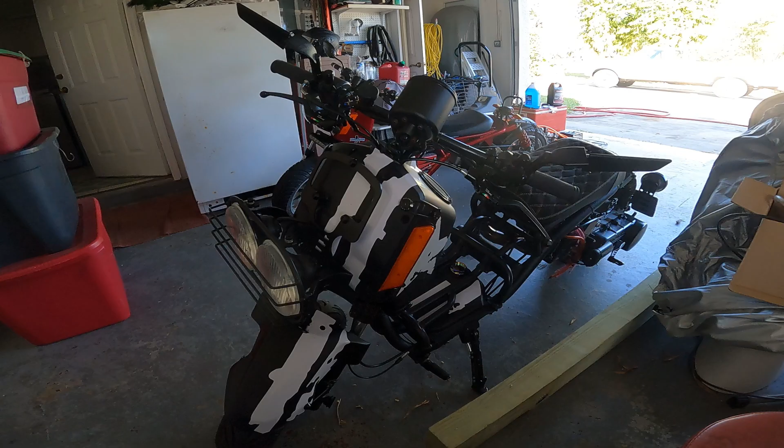I need NOS. Why the hell would anyone put nitrous on a 150cc GY6 scooter? Well, because it looks cool as shit, is why. I'm going to do this video a bit different. I'm going to show you the results of the nitrous first, kind of a before and after, or a side-by-side comparison with and without nitrous. And mostly just for gee-whiz factor for most people watching the video.

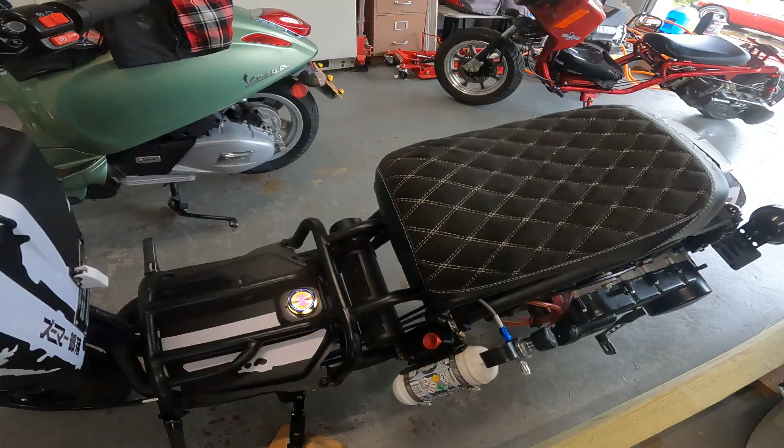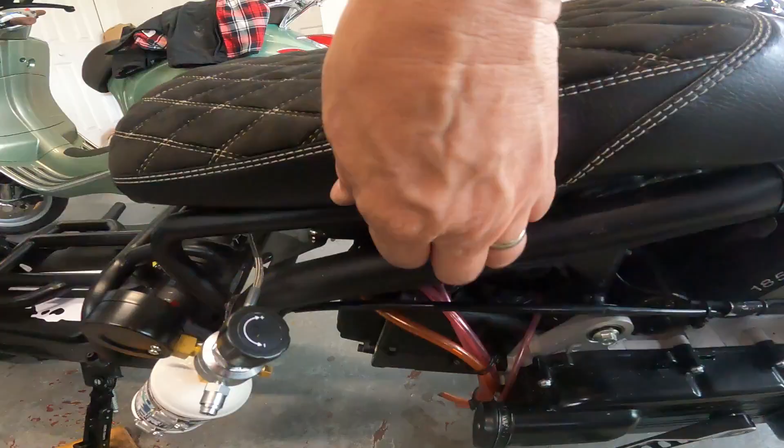But the few of you that want to do nitrous, I'm going to keep on going with the video on how to do it. There's a lot of stuff you have to know to do nitrous, to do it safely and do it accurately. It's not just a simple plug-and-play thing. It has to be tuned and everything else.

If you follow how I do things, I see what RPM I'm at. If I'm running 9,000 RPM, then I gear the bike up. Then, if I can't make 9,000 RPM, I do power mods till I can. So, my last thing I did was the 171 kit. I was making 9,000 RPM. I geared the bike up with the rear end gear kit, and that put me back down to 8,000 RPM. My plan now is to use nitrous to get me back to 9,000 RPM and more top speed.

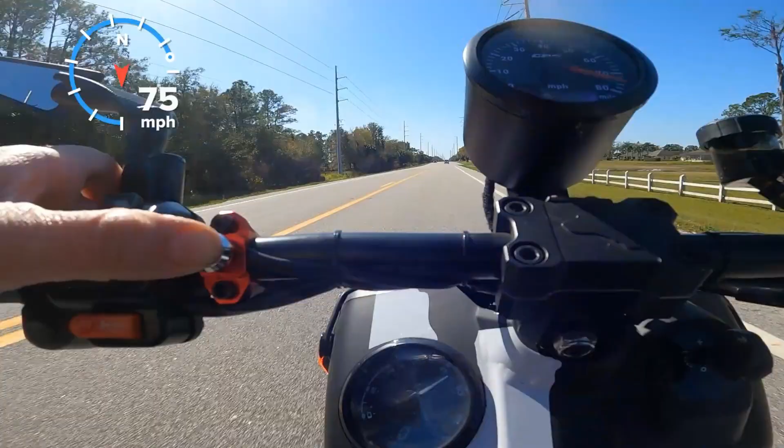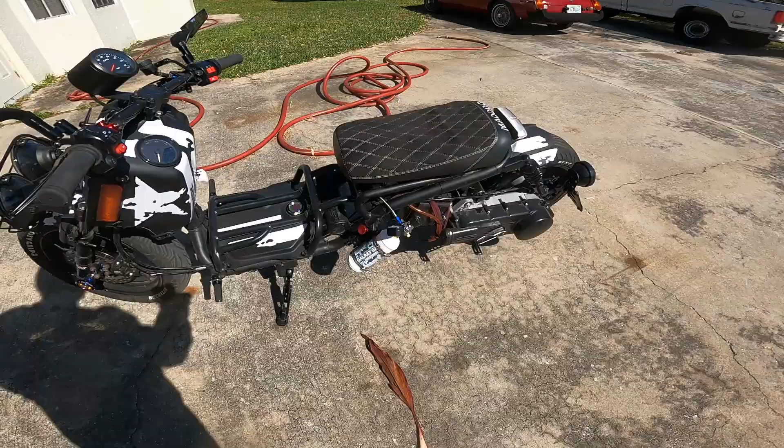This thing just kept on going on the spray. I think it would have went 80 or more. Looked like I was hitting 9,000 RPM, so I backed off because I don't want to go over 9 grand shooting nitrous in there. Who the hell knows what'll happen? But yeah, epic. All right, that mod is super cool.

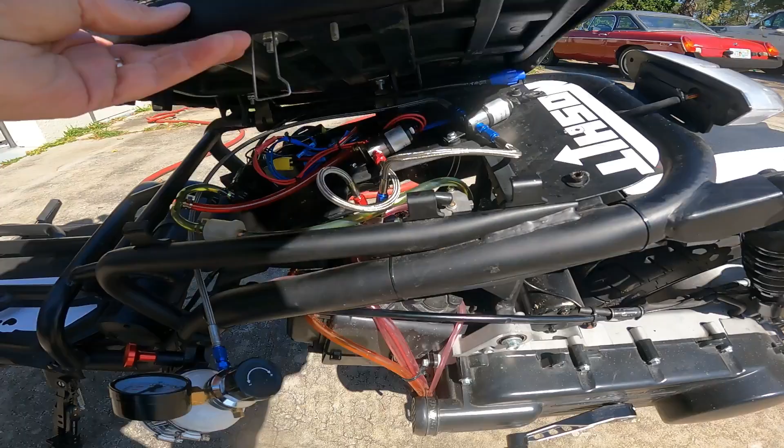Not only does it just add tons of cool points, but it's super fun. I just can't get enough of pressing that red button. Holy crap. It's really awesome. And yeah, so it worked out pretty good using the whippet there.

And this is a long video to follow. It should be a mini series on Netflix, but there's just so much to cover when you're putting on nitrous. How to install it, how to not blow your motor up, how to tune it, and all the things involved. It's just a long video.

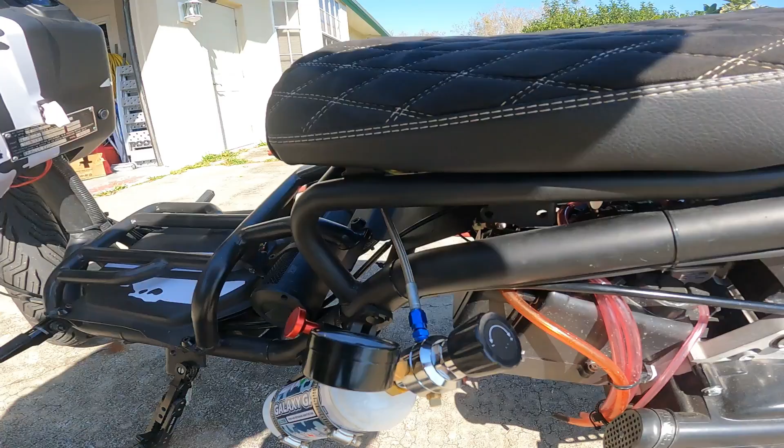So yeah, you can laugh along with me at the comments where everyone tells me I'm gonna blow my motor up. Mostly the people that comment like that didn't watch the video. But if I do blow it up, who the hell cares? I'll put a 232 in there, make another video. That's just too freaking fun.

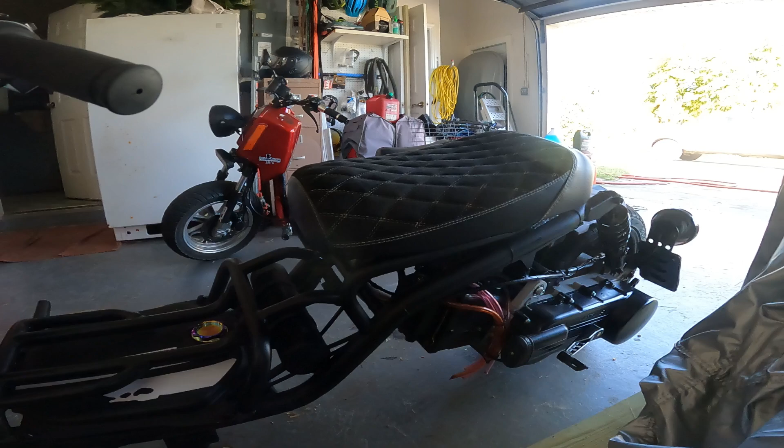The big fear on nitrous is you're gonna blow your motor up or whatever. And there's some truth in that. But we have to understand what nitrous is first before we install it. Laughing gas, nitro, NOS, NOx, whatever you may call it, it's all the same stuff. It's technically N2O, dinitrogen oxide. It's a plenty safe substance. It's the same stuff that's in the air we breathe, nitrogen and oxygen.

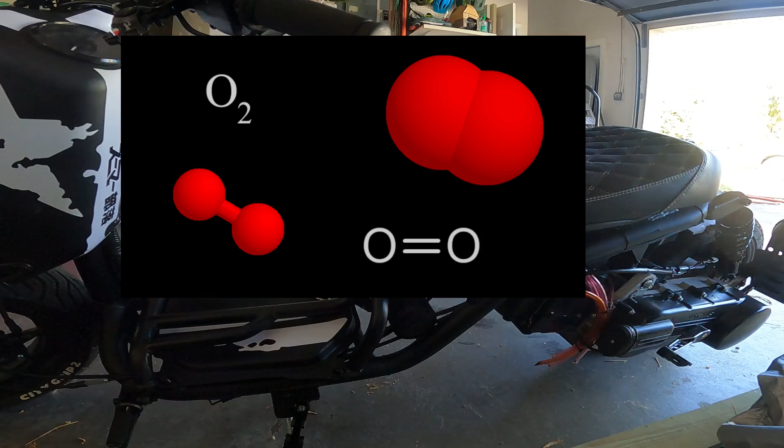Contrary to popular belief, nitrous is not flammable. It's just like oxygen. It's an oxidizer or an accelerant to a fuel. Oxygen causes fuel, or whatever it's burning, to burn hotter and faster and requires more fuel when it's burning. Let's go back to class here. Just like in your OSHA training, you have the fire triangle. You need 3 things to create fire: heat, fuel, and oxygen. You take away one of those things, the fire goes away.

So the oxygen is just an accelerant or an oxidizer for that fuel, to allow it to burn better and hotter. But the big fear behind using nitrous is we're going to blow our motor up. And to address that, you really have to understand what blows a motor up, what that actually means. And to understand that, you have to understand what detonation is. Detonation is what kills your motor.

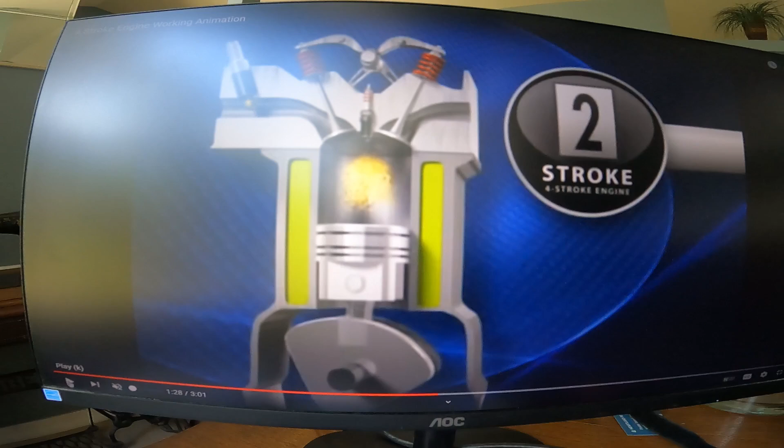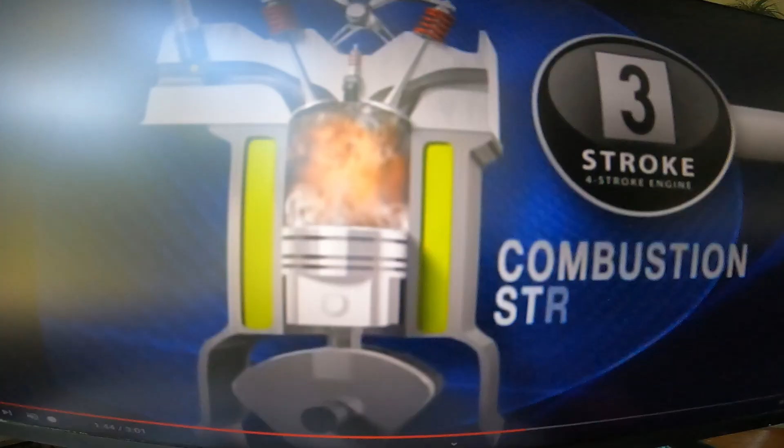All right, the piston pulls down and sucks in an air-fuel mixture. Then it pushes back up for the compression stroke, and a spark should happen right at the top there. That spark plug is going to ignite the fuel-air mixture. It's going to blow it up and push that piston back down with a lot of force. That force they refer to as head pressure. The more fuel and air you put in here, the higher the head pressure, the more force you're going to push that down with. The spark plug has to be timed perfectly to explode that just as the piston's heading downwards.

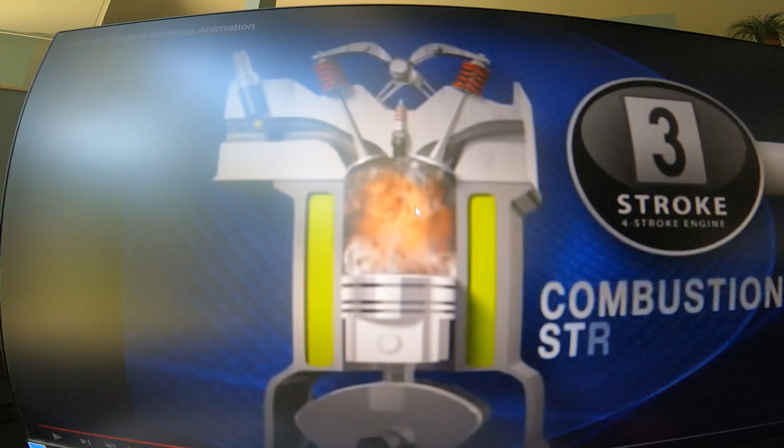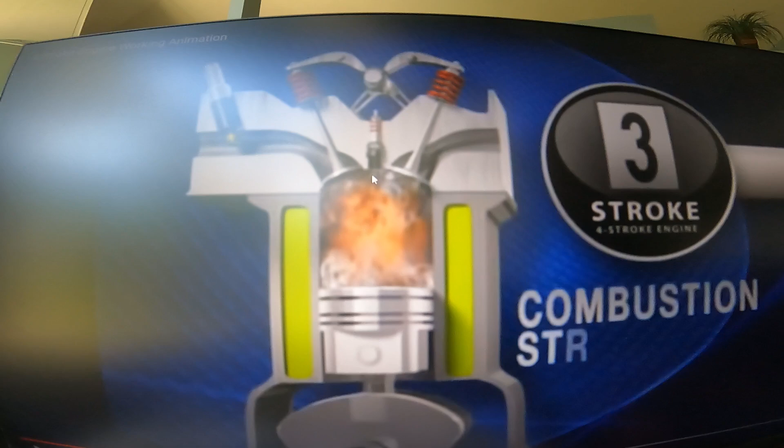And that's done through ignition timing, a pickup sensor on the stator that tells a spark when to happen, but it actually doesn't tell the spark. That goes into your CDI. Someone that made that CDI has mapped it, we'll say, a timing curve of degrees before and after top dead center of where that spark's going to happen.

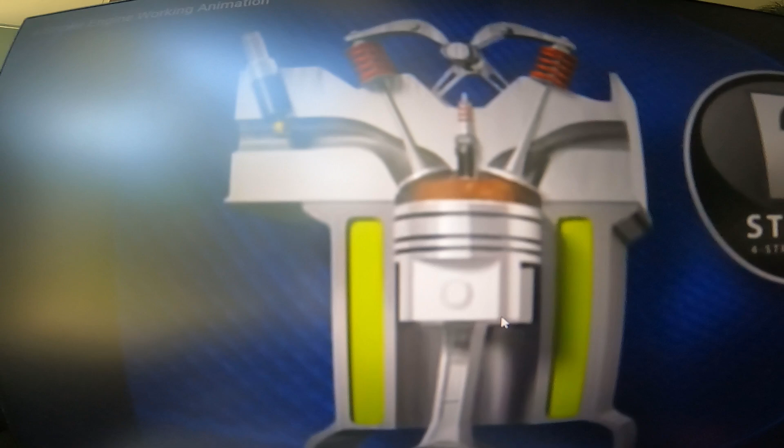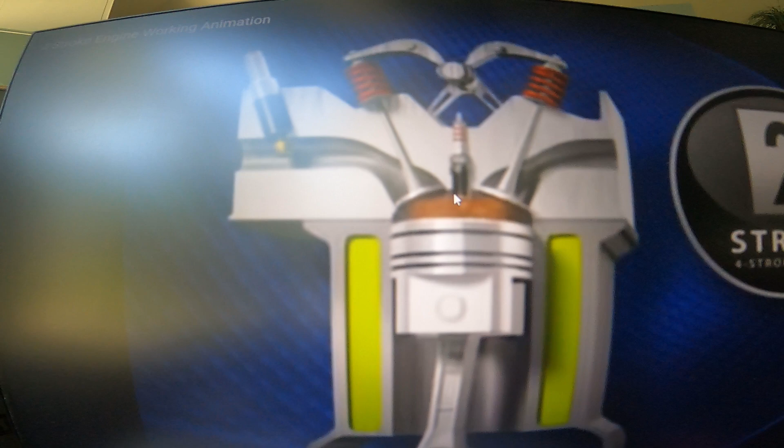So what that means is a little bit before that piston reaches top dead center, maybe right in here, it's told to spark. Because the engine's rotating and it's hard to time this, if you want to get this thing nailed right at top dead center when it's going to make the downstroke and all that pressure is going to push the piston rod down, you've got to kind of tell it a little bit early to spark. And by the time it sparks, it nails it right at the perfect place.

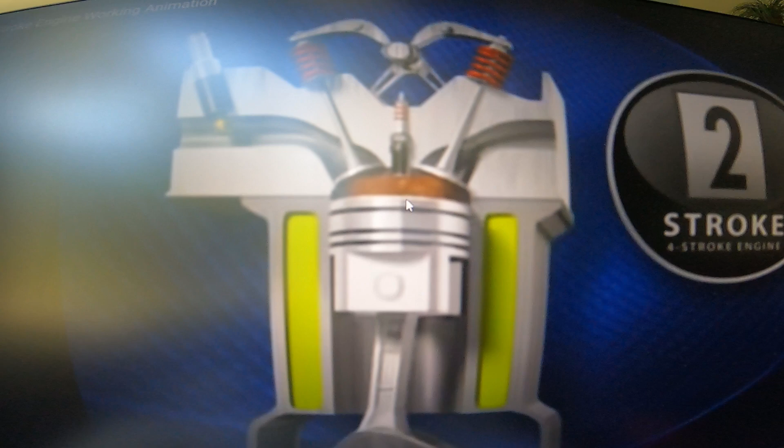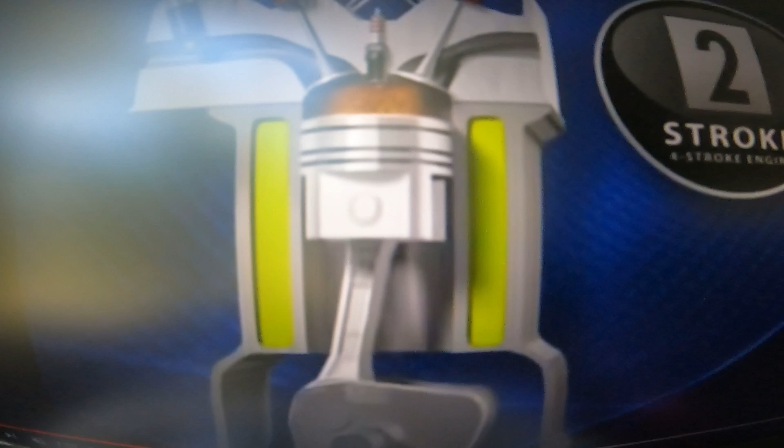The faster this engine goes, the earlier you have to tell it to spark. So a typical car might run at 10 degrees before top dead center for the ignition spark. As you accelerate, either it has a vacuum advance or an electronic ignition advance, and it's going to advance it to around 30, 34 degrees, somewhere in there. And you're actually going to tell that thing to spark at 34 degrees before top dead center, even into here somewhere, while that piston's on the way up. Because the piston's going so fast, by the time it gets there, that spark will happen at the perfect timing.

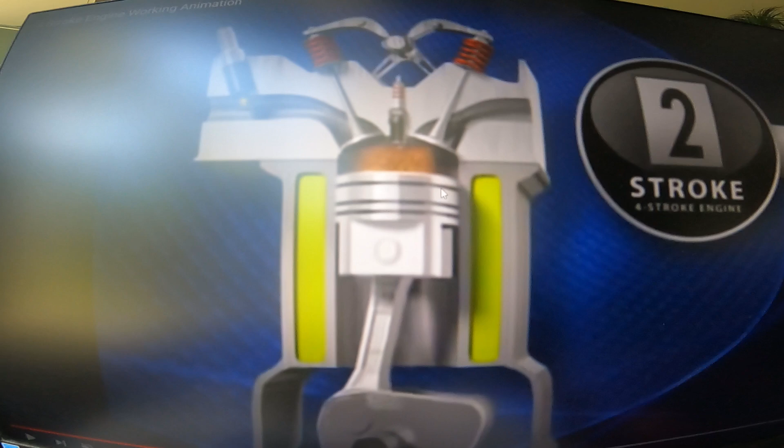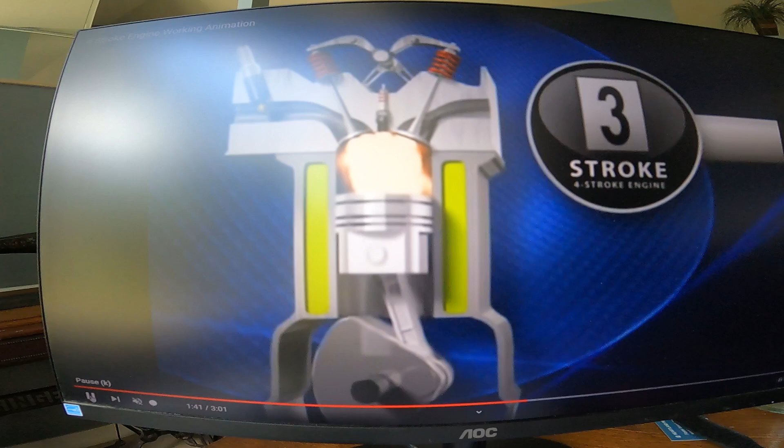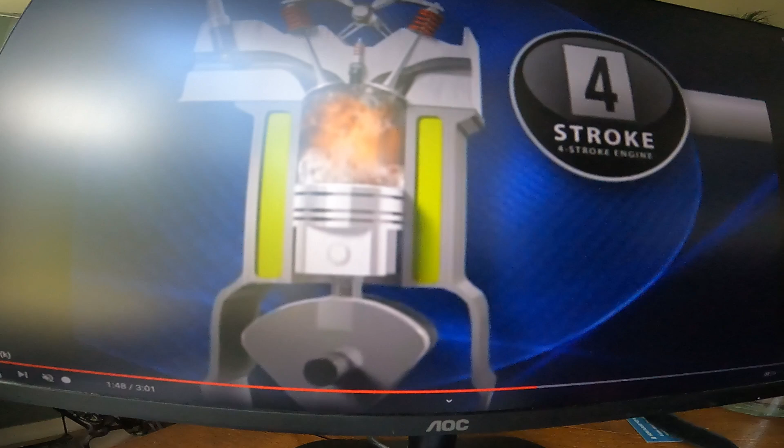If that spark happens before this piston gets to top dead center, if it actually sparks and ignites that fuel mixture, it's going to try to blow the piston back down the wrong way. It's going to work against the rotation of the engine. And that's detonation. And detonation is the same as knocking or pinging or something like that. It's a very metallic sound. It's very bad for the engines. It damages pistons, it damages spark plugs, it damages valves, things like that.

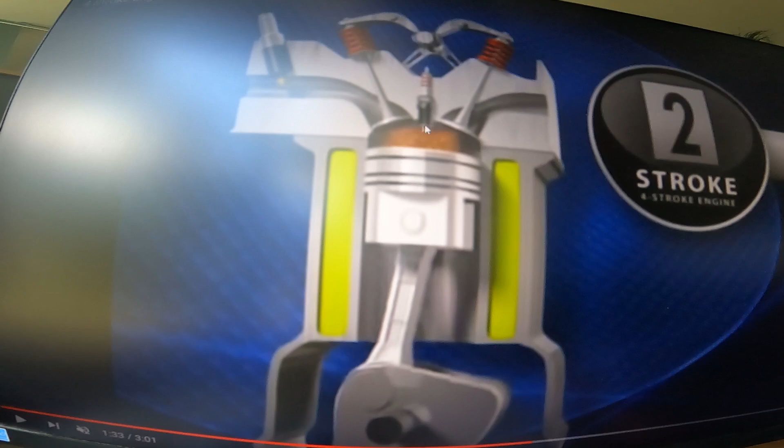When you start increasing this head pressure with more fire, more oxygen, more fuel, the damage gets even more significant. You can bend these crank rods, you can blow holes in your pistons, you can do all sorts of damage if you have enough head pressure. That's why you see guys running forged pistons in high compression or blower situations where they have superchargers, blowers. They'll put a forged piston in there to keep that piston from cracking.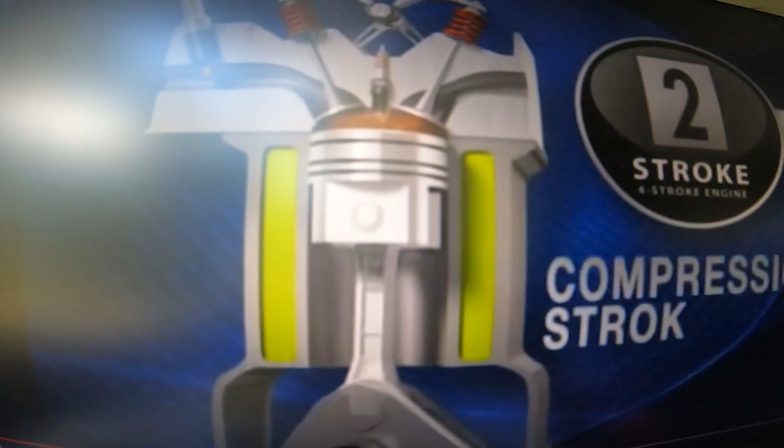But if you can get that spark to happen just as that piston rolls across top dead center, it pushes the crankshaft down in the proper direction, and it's a very smooth operating engine. No pinging, no knocking, no anything like that.

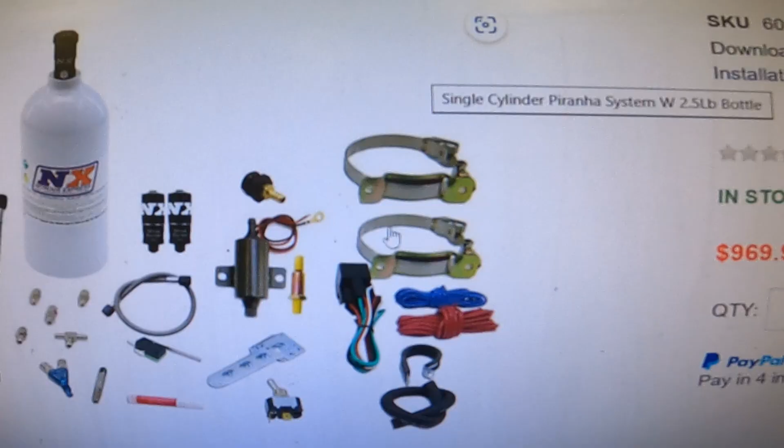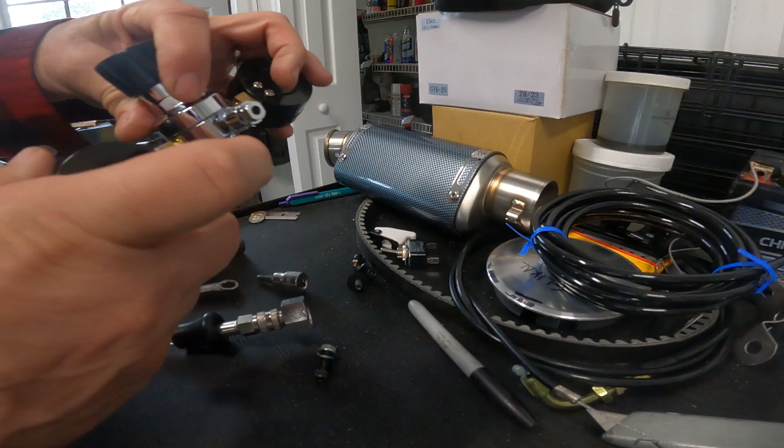Now the primary cause of detonation is heat. What happens is, we'll back this up here, this head and everything in it is hot from the engine running. The piston's hot, the valves are hot, the spark plug's hot. If it gets hot enough, it'll light this fuel mixture before the spark plug fires. So we could be back in here, right about here. The piston's on its way up, fires right there. It touches these hot surfaces, it ignites, and it prematurely detonates. And that's caused by heat. And it blows the piston back down the opposite direction, damaging your engine.

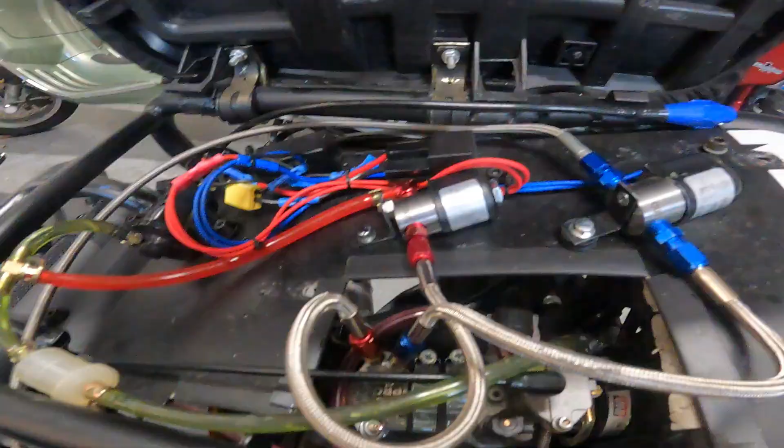Now heat is usually caused by a lean condition. And what causes something to go lean is when you start adding superchargers. Superchargers add more O2, but they haven't added any fuel. You get a hotter burn, you get a faster burn, but you don't have the fuel to cool it, and you're going to end up with detonation. When I say supercharger, I'm talking about mechanical forced air induction, and that's your Roots chargers, or maybe your Vortech superchargers, even a turbocharger, something that forces more air into the intake.

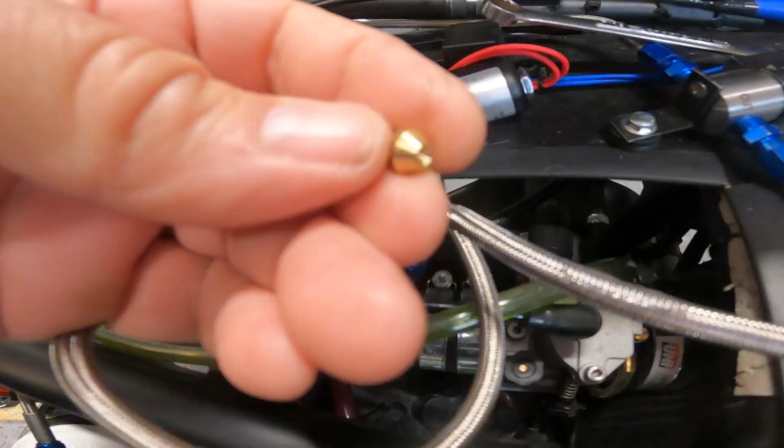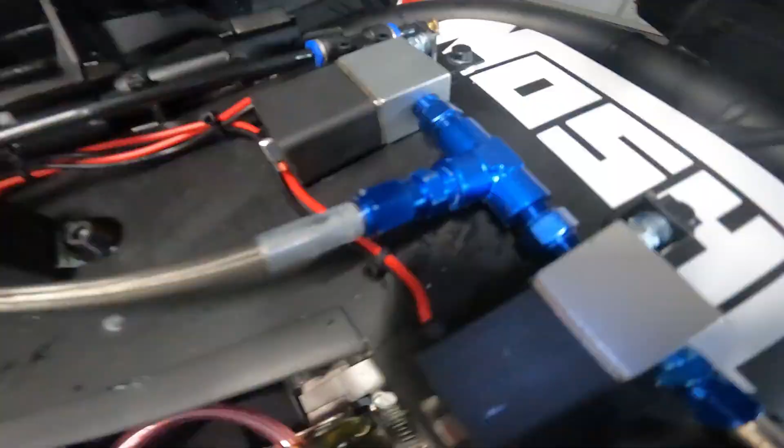And the air that we're forcing in there has 21% oxygen in it. So if you look at what's in air that we breathe, nitrogen, miscellaneous stuff, about 70-something% nitrogen, 21% oxygen. But nitrous oxide, or NOS, is also a supercharger. It's a chemical supercharger. It's chemically giving you more oxygen with that air mixture. And if you look at the chemical makeup of nitrous oxide, it's better than air we breathe. It's 36% O2. So you're going to get a lot more heat, and a lot more burn.

The advantage of the nitrous oxide: at about 500 degrees, the O2 and the nitrogen atoms separate. And when those atoms separate, the nitrogen acts as a coolant.

So if you think about your superchargers, they have intercoolers. Your turbochargers, they have intercoolers. You're trying to control that heat that you're producing inside that combustion chamber. The beauty of nitrous is that we really don't need the intercooler because the released nitrogen is cooling the combustion chamber. So the heat that we're going to have comes from a lean condition, a lack of fuel.

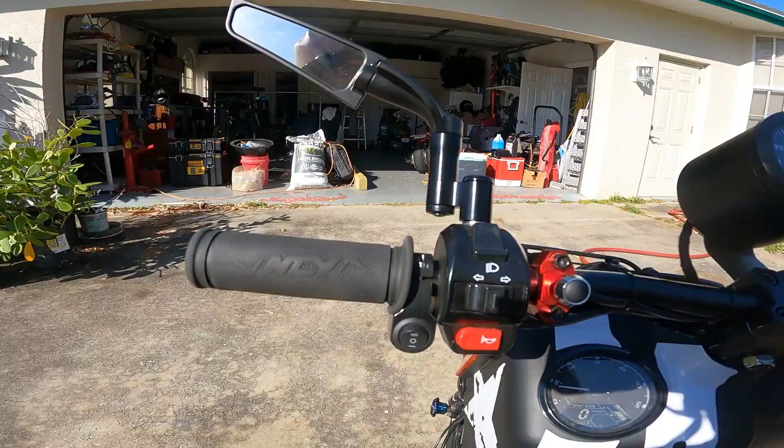That's why it's so important to add fuel and not run a dry system. So the things we do to prevent detonation are we add more fuel. More fuel, more power. If you just run nitrous oxide in your engine without adding more fuel, you're not going to get more power. The O2 doesn't burn and make more power. It just causes the fuel that's in there to burn quicker and hotter. You're just going to get more heat.

So why do they make a dry system? Well, they make a dry system for these cars that have electronic fuel injection or aftermarket cars that you can control the fuel with. You've got your laptop computer in there, like on Fast and Furious. You're controlling how much fuel goes in there so you can run a dry system because your injectors are going to make up for it. Another trick you can do is use colder plugs. They recommend when you run nitrous to run a colder plug, 2 levels colder.

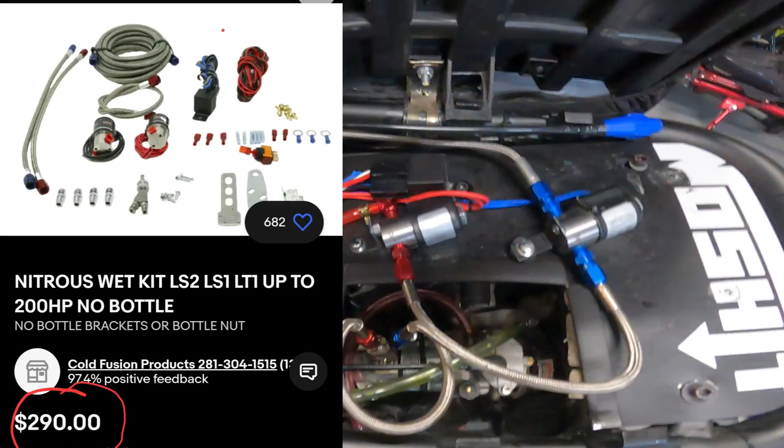The other thing you do is you retard the timing. Remember we talked about shooting that spark to try to time it exactly, hitting it before top dead center. Well, just to play it safe, why not run that spark after top dead center? And then we know for sure it's going to blow up on the downstroke. And that's what we can do. We can actually, what's called, retard the timing. It's not quite as efficient, but we're going to ensure we safely explode it in the right place.

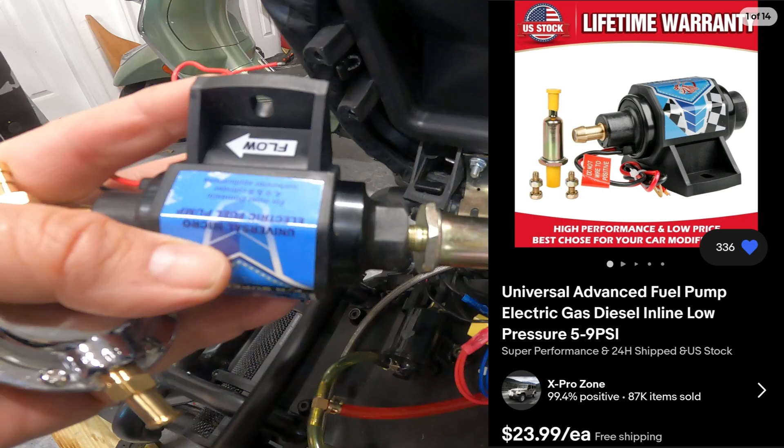The problem is that we can't control that. That little CDI box is controlling our timing curve. The recommended amount is 1 to 2 degrees, not that much. So to control detonation, we're going to add fuel, and then the other thing we can do is use a higher octane fuel. People think high octane fuel, oh, it explodes better. High octane fuel is harder to light on fire. So the higher octane fuel you run, the less likely that mixture will explode before it's supposed to. It can get hotter before it detonates.